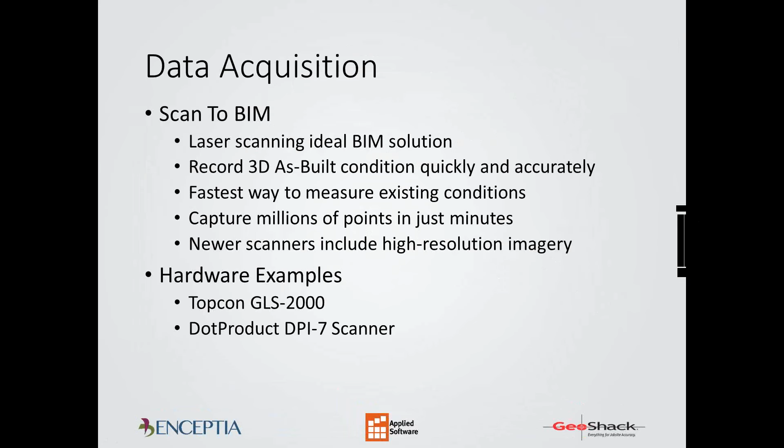I'm going to quickly show you two scanners, the Topcon GLS 2000 and the DotProduct DPI-7 scanner, and give you a little example of how they're on two different ends of the spectrum, but can both be used and be very powerful as far as collecting data.

The Topcon unit you see here will shoot point cloud or measure out to over 1,100 feet, and it will easily collect points in full dome in about 3 minutes with images. There are 2 cameras on this unit, a telephoto lens and a wide-angle lens, so we can capture very high-resolution images if need be. But what's really different about this unit compared to some of the other units out there is that it will register scans automatically.

Now what that means is many times we have to take this scanner, set it up on a tripod, and move it to different locations in a particular area, and then afterward we tie those different scans together, or register them together. This unit will recognize it during the scanning process and register automatically for us.

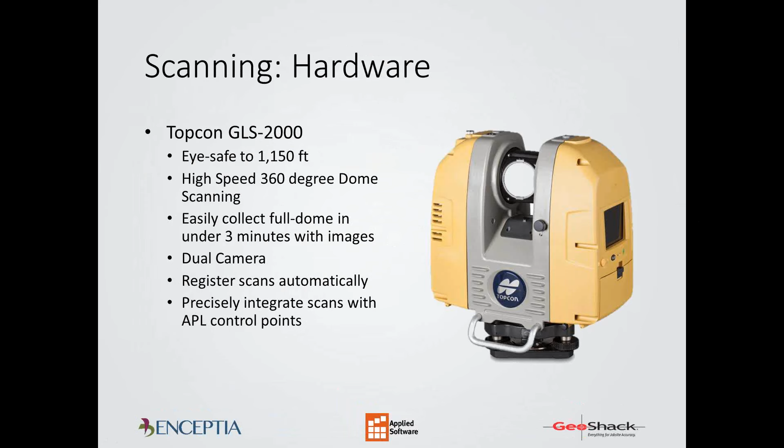Another important feature of this is that it integrates with APL control points. I'll show you Autodesk Point Layout a little bit later, but as long as we have control points at the job site in our model, we can take this point cloud and bring it into our model quickly and compare it to our design model.

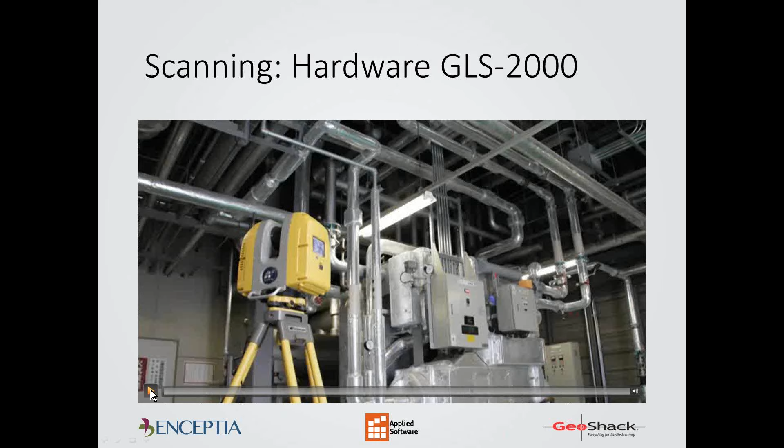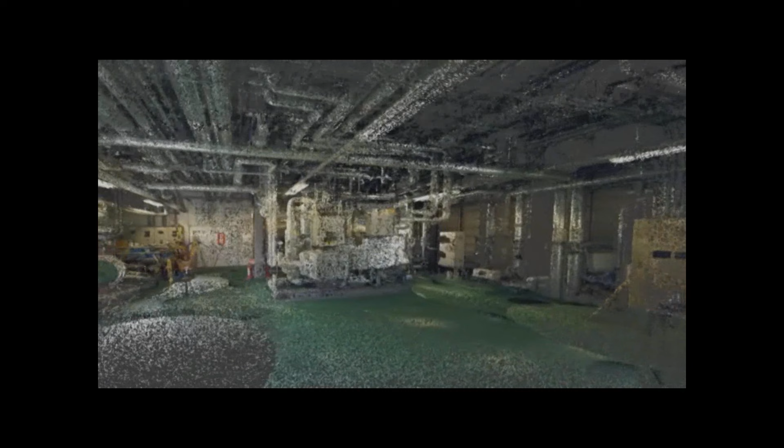Now what I wanted to show you here is just a quick little video. I'm going to turn off the volume here, it's a very short video. This is a picture of the room, there's the scanner. For those of you who haven't seen point clouds, you are looking at a point cloud. Notice that as we move around, the imagery kind of fades a little bit and we're looking at the points, but as we stop, all those images that have been recorded are now visible. So it looks like we're in a true 3-dimensional model when really we're just floating around in our point cloud.

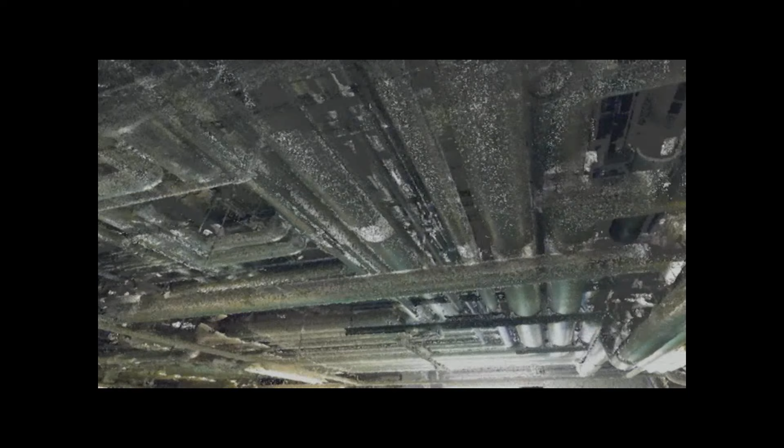We do work with other partners that will recognize these points that represent a pipe and replace those points with an actual pipe. So there are ways to convert this point cloud into a BIM file to use back at the office. On the opposite end of the spectrum is this DotProduct DPI-7 scanner.

It's a small handheld unit, and what's great about this unit is it's great in tight spaces. One of the things with the larger scanners is that you have to move them constantly. They set up in one location, but they may not see the entire room because objects may be in the way. Well, with this unit, you are literally walking around the space, and you can walk around objects that are hiding specific locations in the room.

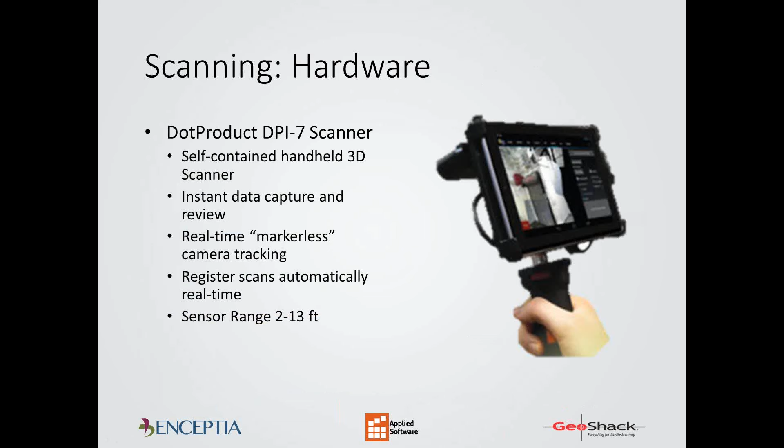It also has real-time markerless camera tracking. You may have seen scanners on job sites where they place markers up on walls or columns, used on purpose to tie those scans together or register them later on. With this unit, it'll register the scans automatically. And the range on this unit is anywhere from 2 feet to about 13 feet. That may not sound far, but for what this is designed for, it's the perfect solution.

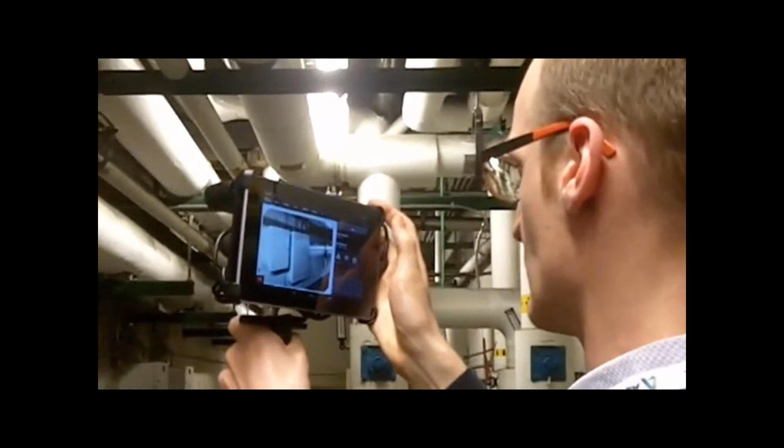I'll just show you a quick video of what it looks like running this scanner. Here we're holding the scanner. You got a nice big screen. You can see it, it looks like you're shooting video.

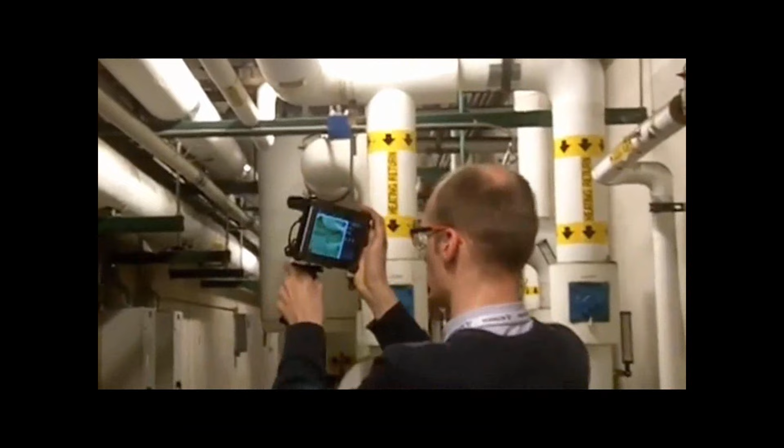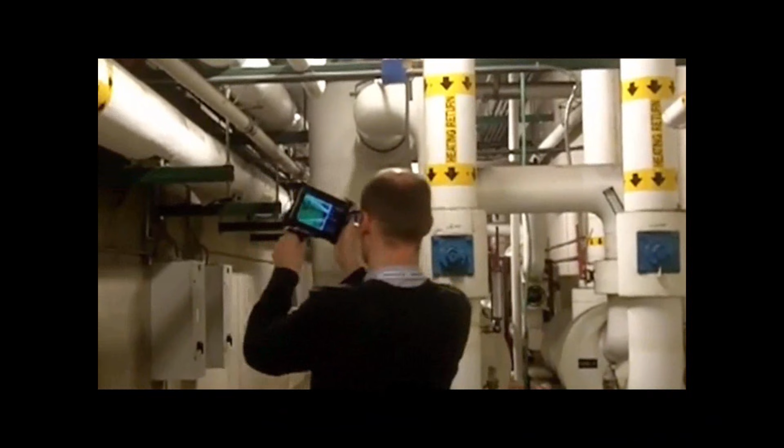What we're going to do is get this set, then hit the record button. The screen turns green, and now literally you're just walking along, scanning everything that you see on the screen. You just move this up and down and around until you grab all your points. If you later find out you missed a spot as you're reviewing it, you can go right back to it and it'll register the scan where you left off.

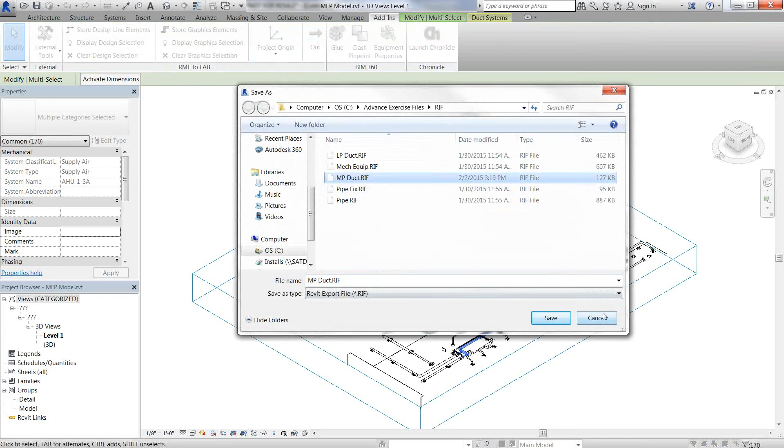So I'm going to select store design line elements and save this out as my RIF file. Once I have that done, I'll go ahead and bring that directly into ESTmep. One thing I'll note here with fabrication products having a unified database, I can bring this directly into ESTmep, and that will allow me to send it straight to CAD MEP to finish out the detailing and CAMduct. So it's really what I want to show in this process. Go ahead and import that RIF file.

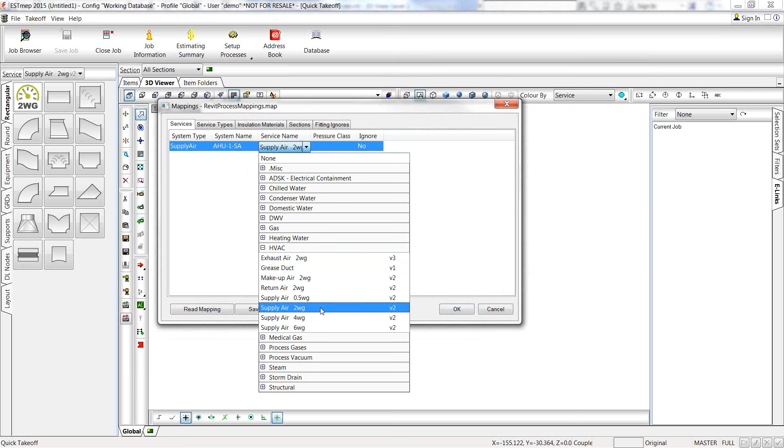You'll see here, I've already gone ahead, and it remembers, since I've done this already, I have my system type and my system name. Here's the information brought over from Revit. I'll simply select the service that I already have defined in CAD MEP in my database. The service has my pressure class assigned to it, so when I convert this over, it will give me my standard straights and fittings based off of my shop standards. So I'll go ahead and select OK.

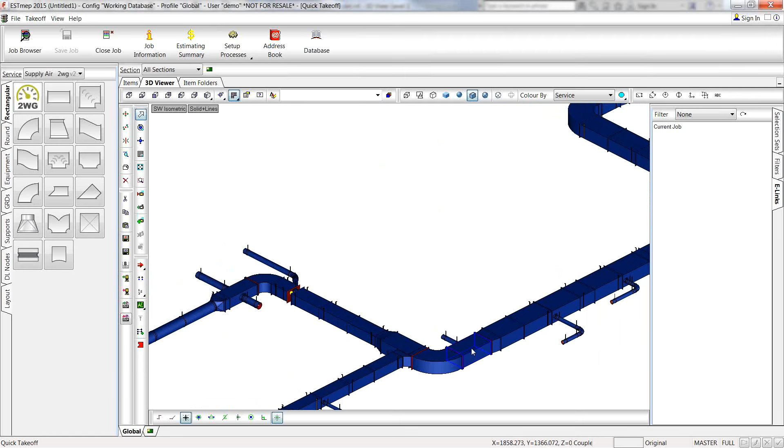And there you go, that was that quick, converting the Revit model. If I zoom in here and look, you'll see my straights are based off my pressure class. You also notice that there's some missing gaps. So while this is a good conversion, there's still going to be some things that need to be fixed. Like I said, here's my standard straight, following my pressure class, giving me the correct connectors and seams. We'll worry about fixing this stuff once I bring it into CAD MEP.

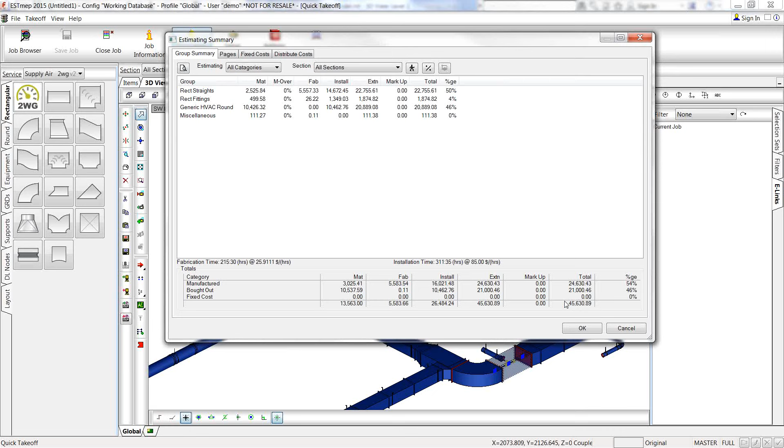Run my estimating summary, and here it will give me a material cost, fabrication cost, and install cost, all set up based off of your shop standards, and give me a total. If you're using plumbing or pipe, you can also use Harrison or a similar supplier to bring in your pricing. You can also run reports, so here's an ancillary list, as well as export this data out to Excel.

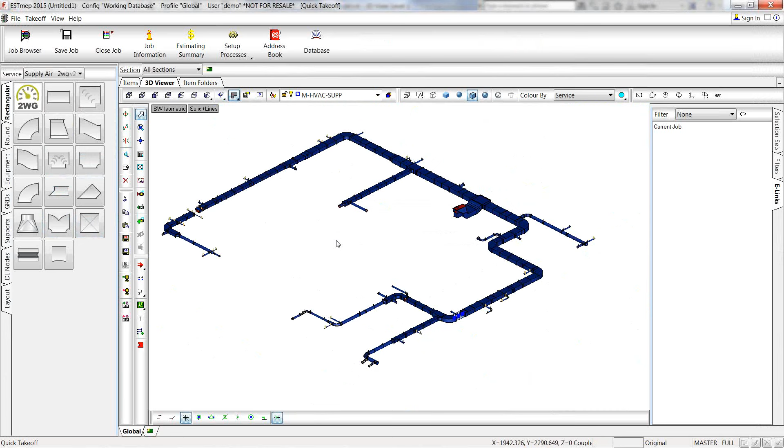So once I've won the bid, I'm ready to send this over to CAD MEP and let my detailers finish out and fix some of the things. So I'm going to go ahead and save this.

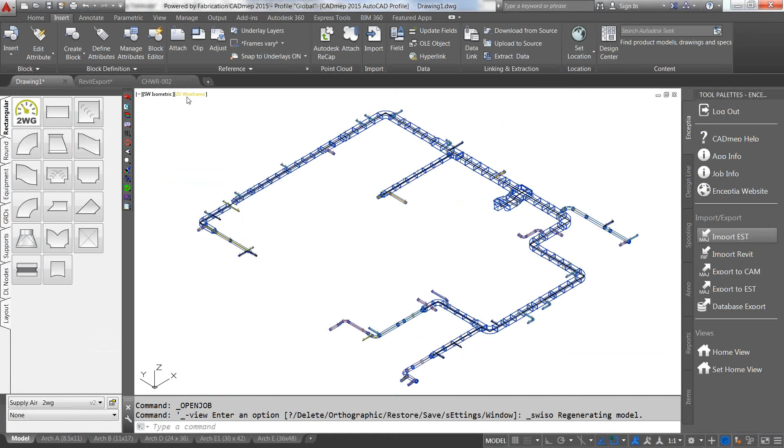And open up CAD. I'm going to open up that same exact design in EST. And there you go. So now that I have it into CAD MEP, I'll go ahead and make the changes that I need to, so that I can get it ready for coordination.

So I'll take a look here. I've gone ahead and made some of the changes that I need to and fixed some of the changes as well. I wanted to note when I bring it over into fabrication, with design line, it will fill in my hangers automatically. So that's one thing that was added from the Revit file to CADmep and ESTmep, are my hangers.

So now that this is ready to go to Navisworks, I'll send it over to Mark.

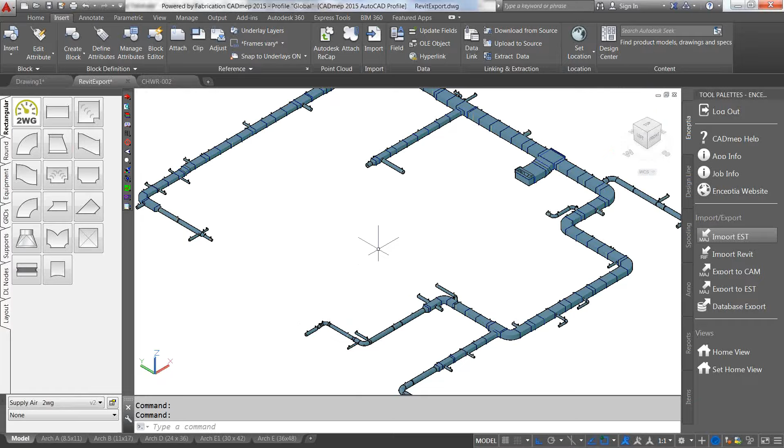All right, thanks, Lyle. So now I'm going to talk about coordination because we have that design file now that Lyle has done. We want to make sure that it's coordinated with the rest of our project. So we have a couple different ways of doing this.

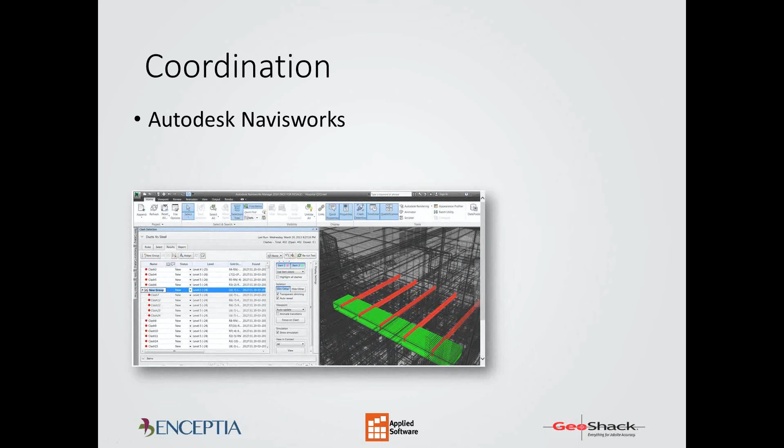Autodesk Navisworks has been around for years, and traditionally we've used this primarily for clash detection. Navisworks does a whole lot more than clash detection, but this is just about what everybody uses Navisworks for. Recently, Autodesk BIM 360 Glue, another product by Autodesk, it's a cloud service that we can do clash detection in the cloud. So both units allow us to do clash detection.

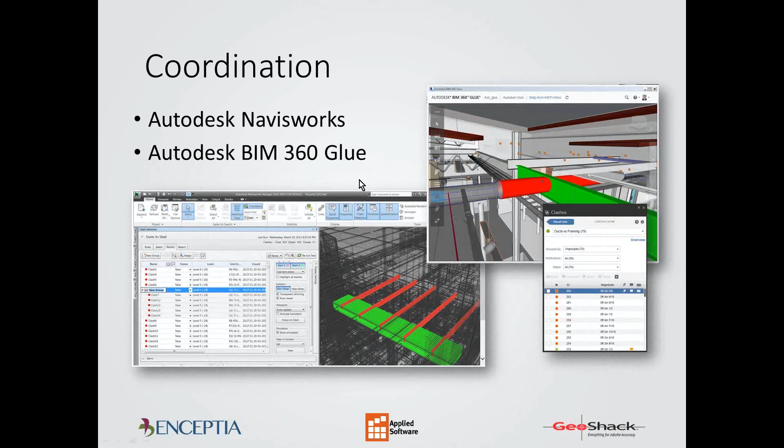We get reports and we can find out where the clashes are. But there are some advantages that Glue has that Navisworks does not have, and there's also some advantages with Navis. Let's just look at the workflow when we use Navis and then the workflow when we use BIM 360 Glue for coordination. So Navisworks Manage.

Typical workflow. Typically you have your architect, your structural engineer, MEP engineer. They're all working in their own little silo, creating their models, and then they will send it to a BIM engineer, typically the BIM manager. The BIM manager will collect the files. Now the way the files are sent traditionally has been like FTP, and that could take many hours. Then the BIM manager has to download those files, has to put them all together, bring them inside of Navisworks, and then start generating clashes.

When clashes are complete, then clash reports are sent to the architect, another set of clash reports are sent to the MEP engineer, and each discipline is working independently trying to resolve their clashes. Once they resolve their own clashes, the architect will get the files back to the BIM manager, maybe in a couple days. The MEP engineers, they're a little bit better at this, and they'll get their files back to the BIM manager maybe on Wednesday.

On Thursday, the BIM manager then collects all the files and starts doing clashing again. By Friday they may have resolved 50 clashes, but because the architects and engineers have been working in their own files, there may be 40 new clashes that have been created because they didn't know the changes that were taking place with the other disciplines.

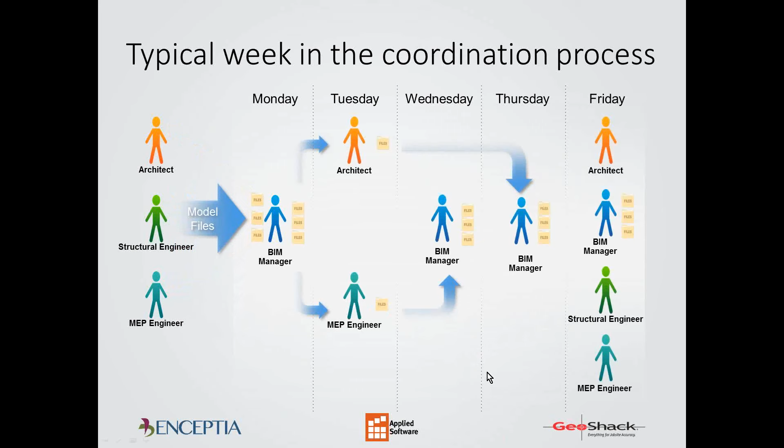Now this has been the traditional workflow with Navisworks Manage. It can always be improved. It's still a very good workflow, but let's talk about how BIM 360 Glue will be able to do that. And actually I have a video very quickly which I forgot about. This is going to show Navisworks and how quickly we can do a clash. In this particular file I have structural, MEP, and I have an architectural model that I'll bring in.

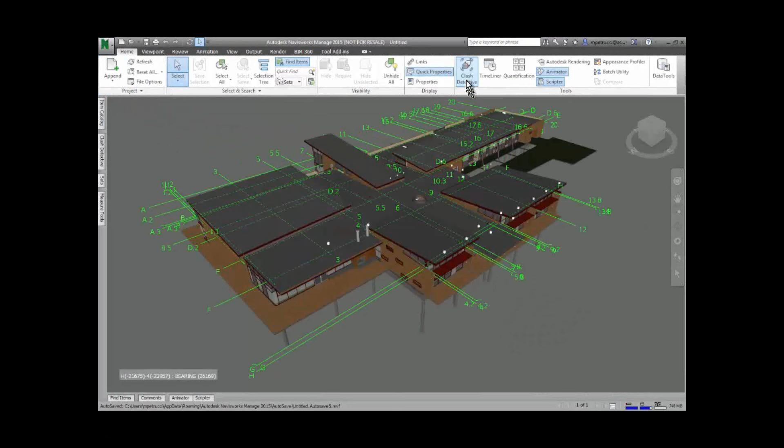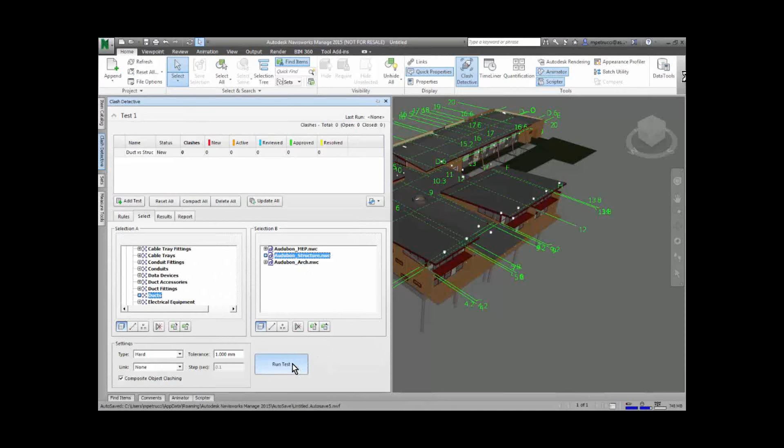I receive these files from the architect using AutoCAD or Revit, and I'll just quickly generate a clash report. So I want to clash and see if I have any ducts that are interfering with any of my structure. So I'll go ahead and select from my MEP model, I'll go ahead and select just my ducts. Now this is the BIM manager doing this, and quickly, instantly, we get a report. And so here's clash number 2, and when I select it, it takes me right to where the clash is. And if I keep clicking on a different one, it takes me to a different clash. The rest of the model is grayed out, so it's very easy to identify.

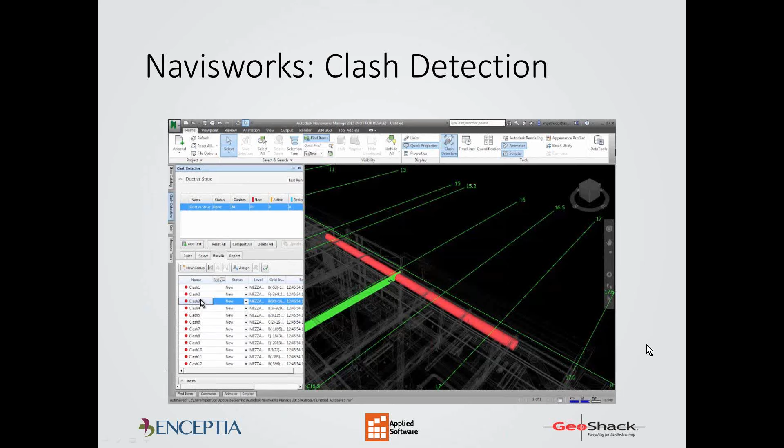What we typically do is generate a report, a paper report or an electronic report that gets sent off to the architect and engineer. But that paper report is obsolete. As soon as one person makes a change, it's obsolete. So with BIM 360 Glue, what we do is on Monday, the architect, the BIM manager, the structural engineer, MEP engineer, instead of sending their files to the BIM manager, they send it directly up to the cloud, to the BIM 360 cloud. And so now at any time during the week, the structural engineer, the MEP engineer, they can compare their models. The MEP can quickly do a clash detection anytime, and they don't have to wait for the BIM manager to do it.

They don't have to wait for him to collect the files and then send the reports out. It's advised that as you're working on a project, you update the model in the cloud at least once a day, if not 2 or 3 times a day. It's very easy to do with just one click of the mouse.

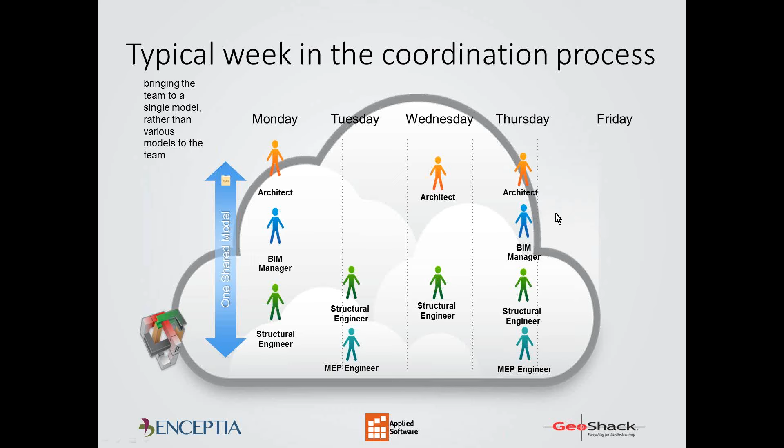So really, we can get a coordinated model by Thursday instead of Friday. We finish a little sooner, and we'll have fewer clashes because we're always comparing our updated model with whatever's in the cloud, and as long as everybody's updating regularly, we'll be able to resolve clashes much quicker.

Some key advantages of BIM 360 Glue coordination over Navisworks: first of all, the model is up in the cloud, so there's always the latest version up there. But a nice key feature is that we can run BIM 360 Glue on the iPad, so I can review the model on the iPad as well as in the office.

At the same time, I can do markups in both locations. What's beautiful about doing markups using BIM 360 Glue is that a view gets saved wherever the markup is, and you send that off to the person who needs to resolve that particular issue. As they resolve it, they'll get a link, they'll see it, they know what corrections they need to make, they can quickly update their model and then repost a new model up to the cloud, or glue a new model up to the cloud.

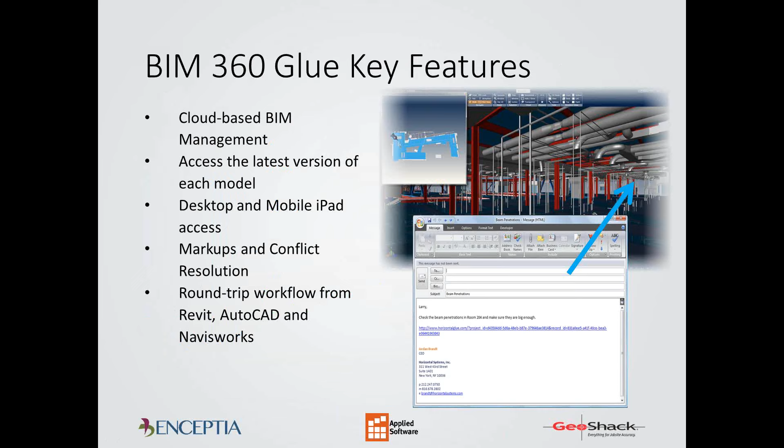The round-trip workflow—there's a feature inside of AutoCAD, Revit, and Navisworks called Pinpoint. When there's a clash up in the cloud, I can pull that down into my model and pinpoint where it is, so it'll highlight the specific object that's clashing. I don't have to go searching for it. Pinpoint will take me directly to where that clash is, or the object that is clashing.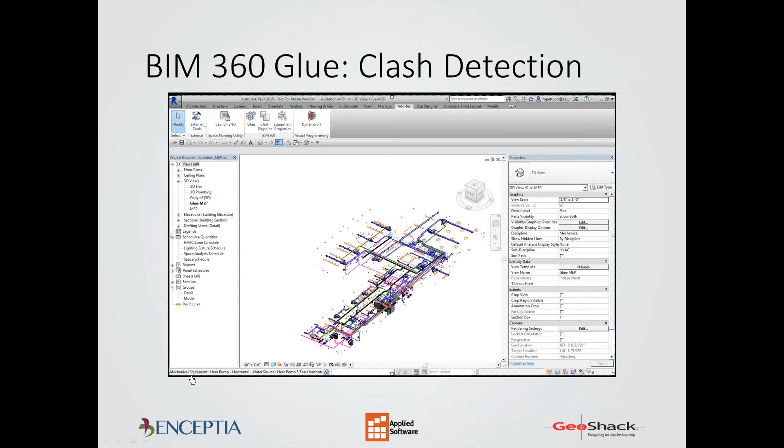I'm going to go ahead and just show you a quick video. So one click, I click Glue. The first time it's going to ask me where to post it. I'm going to pause this right now, and I'm going to post it to a specific project that the BIM manager has set up. Once it's been set up, anybody who's been invited to this project can glue their model.

I could also review markups, clashes, any new views that have been created. I could review this list of files that have been recently modified. As I access this project, I can see all the activity that's happened with my model.

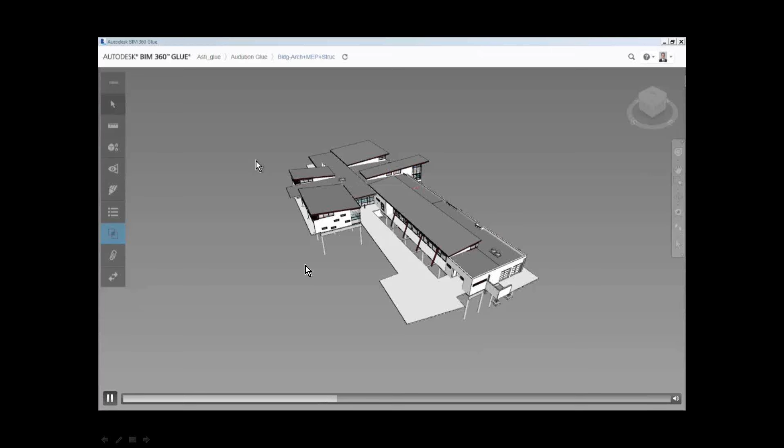I am now opening up the Glue model from my desk, but it's the same workflow as from the iPad. On the desktop, I already have a clash report created, so I'm going to rerun it. As I run this, I'll notice that I have a list of clashes.

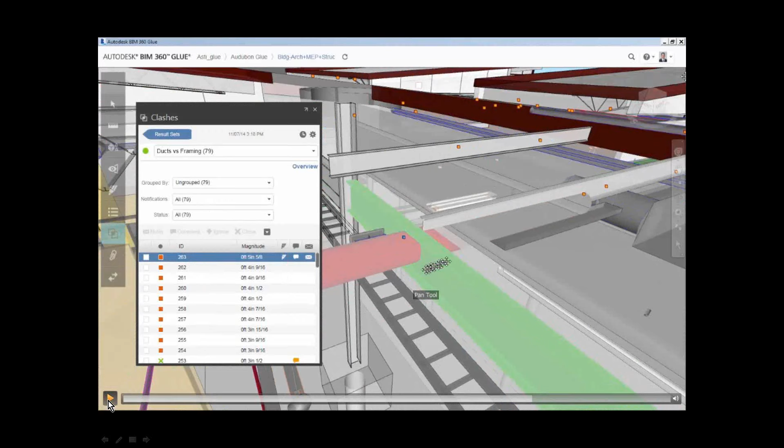I have 79 clashes. Just like in Navisworks, if I select the clash, it takes me directly to it. It highlights the two objects. There's actually another screen I could turn on that gives me more information about each of these objects, but I can see visually where they are clashing. From here, I could email that clash to the necessary people to get it resolved.

So now the purpose here is to make sure that we have a coordinated model. By taking all the reports, the clashes that we have found, and then resolving those clashes and updating our model to resolve those clashes, now we're ready for fabrication.

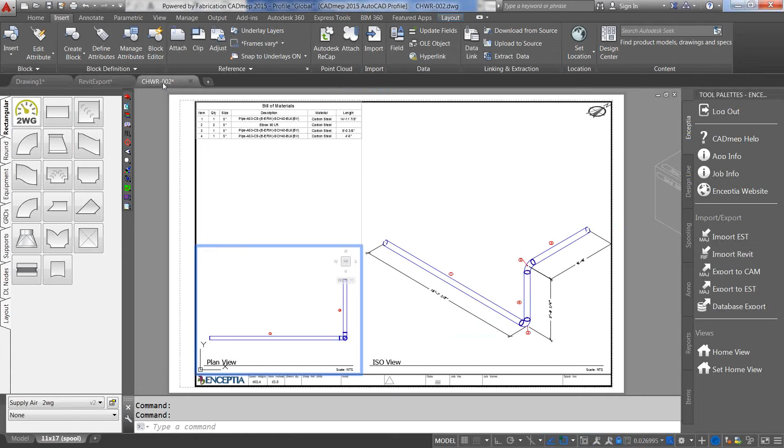Okay, now that this model is ready to be fabricated, for this exercise, I'll send this to CAMduct since I've got sheet metal items in here, as well as if it was pipe or plumbing, I can go ahead and create my spool sheets in here, or create my linear nest sheets for my pipe cut list.

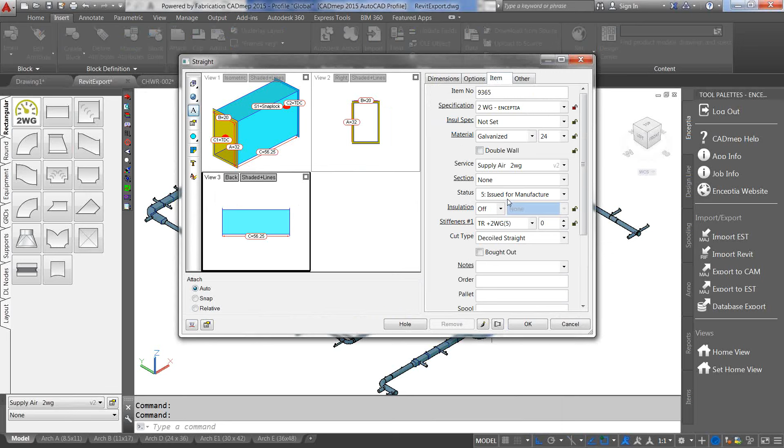So to export this out, I'll just cam it out. I've already done this to save some time, but what I want to make note of here is after I've cammed it out, if I take a look at the status on my items, it's issued for manufacture. We'll take a look at this in CAMduct after I nest it and create the NC file.

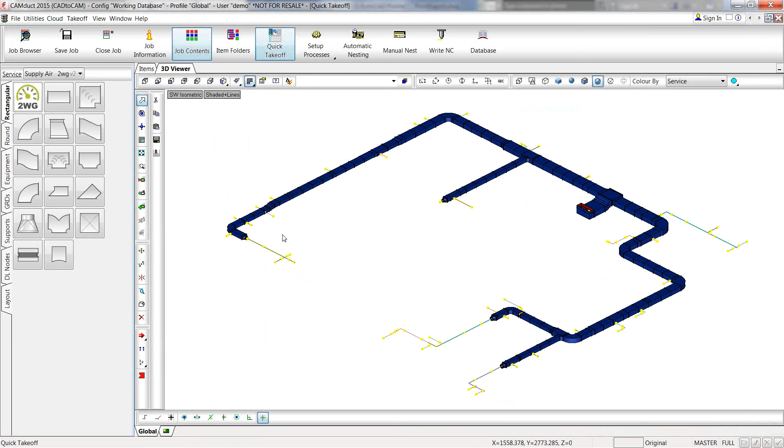So once I've exported it out, I can open up CAMduct, open my job, and take a look. Here are just those items that I exported out, just my rectangular pieces.

So once I have it in CAMduct, and CAMduct's been set up for your specific equipment out at the shop, I can set up a process to easily create my NC files. With this process, I can also have it automatically print reports and labels.

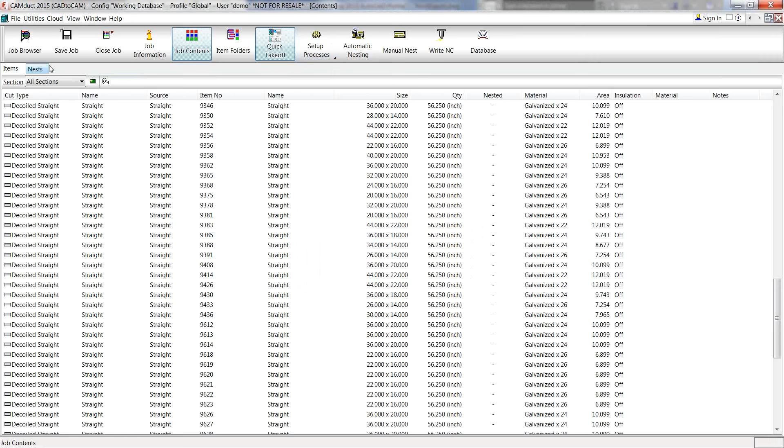So let's go ahead and select my process. And what you're seeing here, it went ahead and created the NC files that I need for the table. It was that quick. If I go out to the shop, I can punch in this NC file.

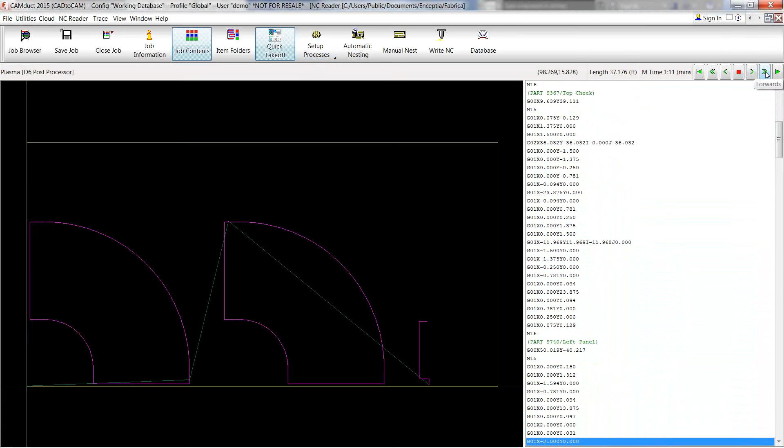I can also preview it in CAMduct to make sure that it's going to do what I want it to do at the table before I burn this. It's just kind of a checkpoint to make sure that it looks correct before I burn this. Just kind of speed that up.

As well as, like I was saying, some of my labels and reports. I'll take a look here, going back to that status, I can print out my item labels and put a QR code or barcode, so that way I can use Tracker to scan each item, and it will change my status depending on wherever this is at in the workflow.

So I've gone from EST to CAD, from CAD to CAM, out to the shop, onto the truck, installed, and so forth. So I can track that whole process by using Tracker.

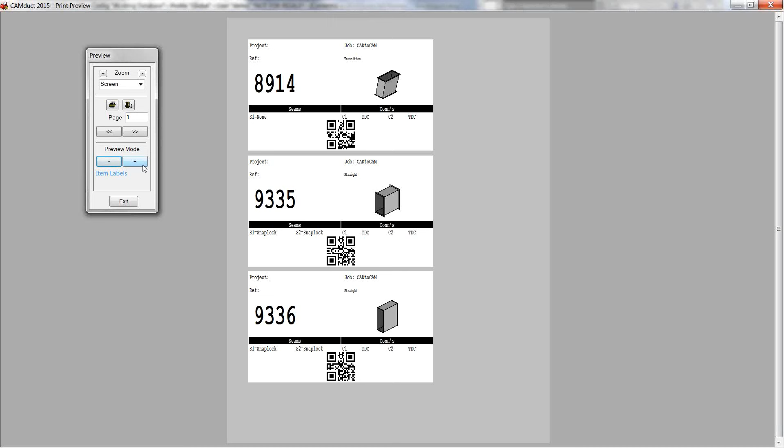So here's my item labels. Here's a weight summary sheet giving me a total of metal used and my ancillary list.

So we'll go ahead, once that's done, then I'll send this back over to Mark and we can take this model out into the field.

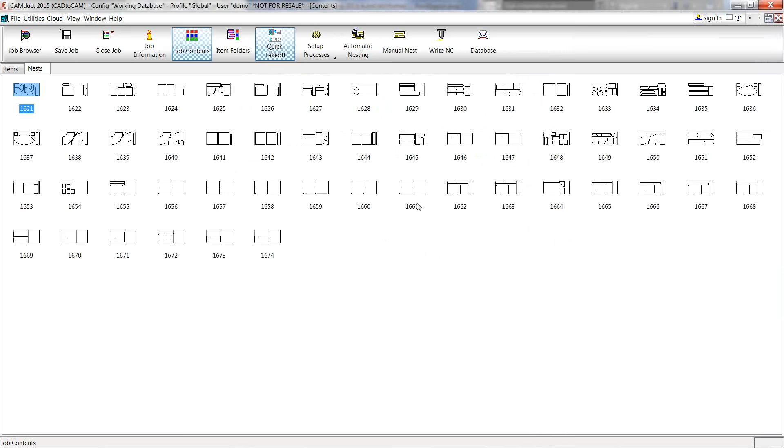All right, great. So now we've got our product. We want to go install that in the field. So we need a quick and accurate way to locate in the field. So this is where Autodesk Point Layout and Robotic Total Stations come in.

So how do we do this? It's really very simple to get our MEP CAD BIM data to the field. And I put here it's as easy as 1, 2, 3, 4. First we need some equipment, Robotic Total Stations. Next we need Autodesk Point Layout. It runs inside of Revit, AutoCAD, Navisworks.

We identify the key users, typically our BIM team and our field team. It's important that we get them both working together so that in step number 4, in 3 to 4 days of training, you can be fully integrated and working together to get the CAD data, the BIM data, out to the field accurately. So how have we always done it in the past?

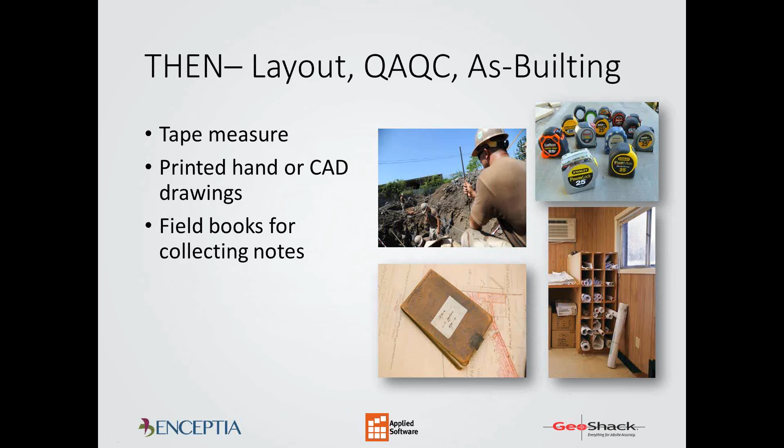Traditionally, we've always done it with a tape measure, printed hand or CAD drawings, field notebooks. You know, who knows if we have the latest drawings? And our tape measure, field notebooks, mistakes happen. We don't mean for that to happen, but sometimes we'll take a measurement that should be 16 feet 9 inches, and we measure 19 feet 6, and we write it down incorrectly.

Well, we need a way to reduce those mistakes, and so that's where the Robotic Total Station comes in. This particular total station is the Topcon LN100. It's completely robotic, and when I say robotic, that means one person can operate this. In the early days when I was working in the field, there was always 2 or 3 of us.

I was the rod guy standing there with one guy looking and telling me which way to go. Well, with the Robotic Total Station, I set this up. I have a handheld tablet PC, and I look on the PC and it tells me where to go to locate my hangers, for example.

What's really nice about this unit, it is easy to set up. It's self-leveling. So basically, I press this green button. I just wait about 45 seconds. It'll spin around, make sure it's level, and I'm good to go.

It'll shoot up to 330 feet, so about 600 feet total diameter, and I'm accurate to within 1/8 of an inch. I shoot to a prism to measure. There are some units out there that will shoot prismless, but depending on the angle in which they hit, it's not as accurate as shooting with a prism.

So here's an example. These are the basic components that you need. The Robotic Total Station can be mounted on a column. On the MEP side, if you get into a project with metal deck, get a column clamp to a column, and then you can locate where to place your hangers on the metal deck.

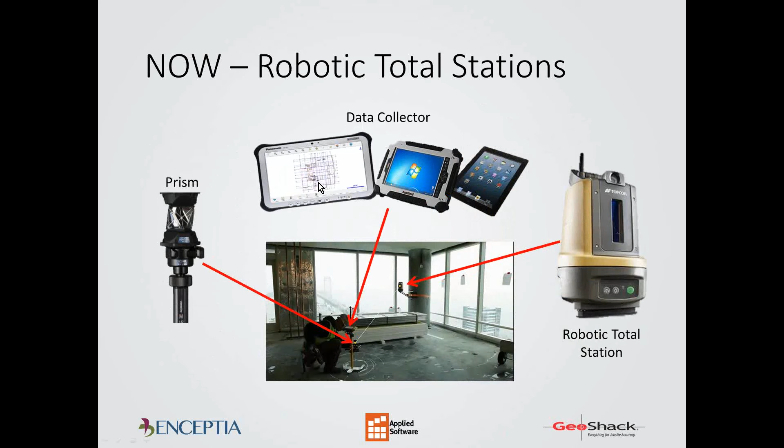So there's the equipment. Well, to use the equipment, I need to get some points. So what are points? Here's some examples of what points may look like. On one side I have Revit, on another side I have AutoCAD. I have some hangers, and at the top of the hangers gets placed an object. That object will have an X and a Y coordinate, as well as an elevation coordinate if needed. It's not always required, but it's always there.

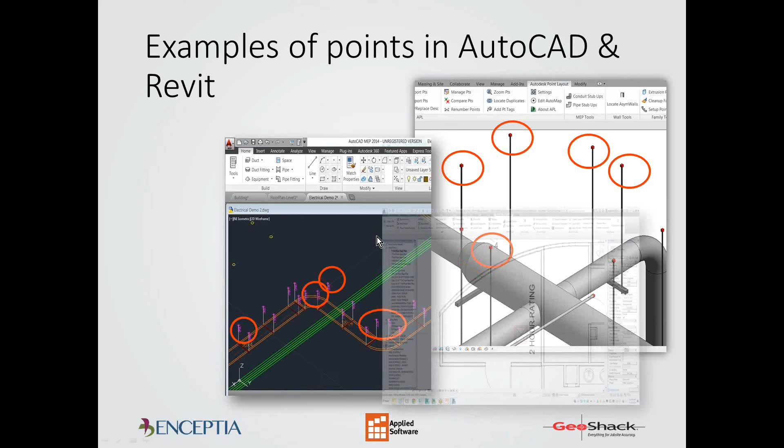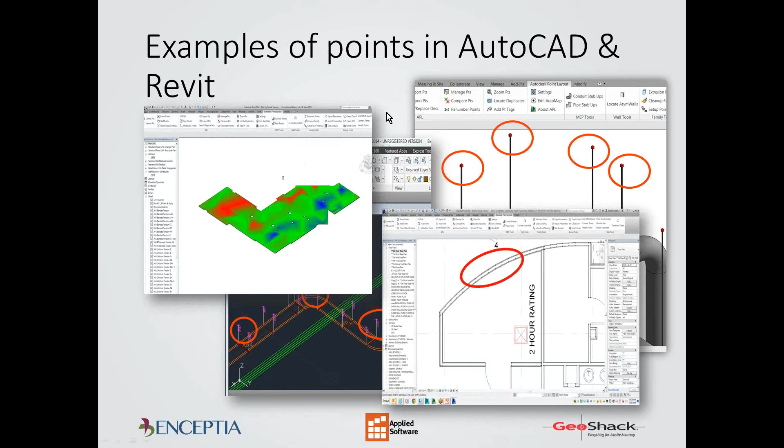Those points then I could use with my total station. Other features I can do is locate walls, or with Autodesk Point Layout, I could do a slab analysis to see how flat a floor is. So there's a lot that we can do with APL than just locating our hangers, but it is very important that we use that to do it accurately.

The 3 major workflows for APL: one is layout. That's where we put the points in our project and then we transfer them to the field, and we can locate those points accurately, efficiently, and we reduce errors. If I measure with a tape wrong, I don't know that till later on in the project. If I use a robotic total station to locate my points, if I'm not in the right spot, it tells me. If I'm off by a certain tolerance, it will tell me.

So there's no reason for me to make a mistake out in the field with a robotic total station and APL. Two is QA/QC. When those points are located in the field, I can collect those points and then compare them to my design model. And I could say, show me all the points that are off by 1 inch or 1/4 of an inch, whatever I want to set. So I can do quality control just to make sure that what is being laid out in the field is matching my design model.

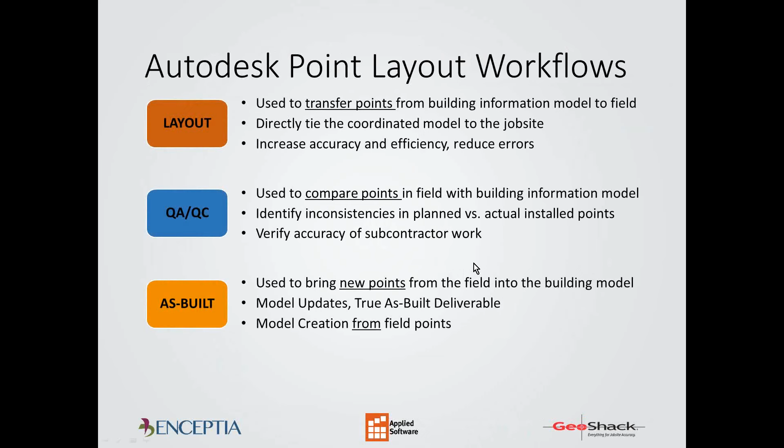Now, for some reason, points were moved on purpose in the field. I'll see that too, and then I can update my model to match what's in the field, which leads us over to as-built. There may be objects that are not in my model, but I want to record them. So I can record points that are out in the field, such as maybe an existing pipe that's not in my model. I could shoot those points, and when I bring them back into my BIM program, I could say connect those points with duct or pipe or a wall or whatever other object I want to put on those points.

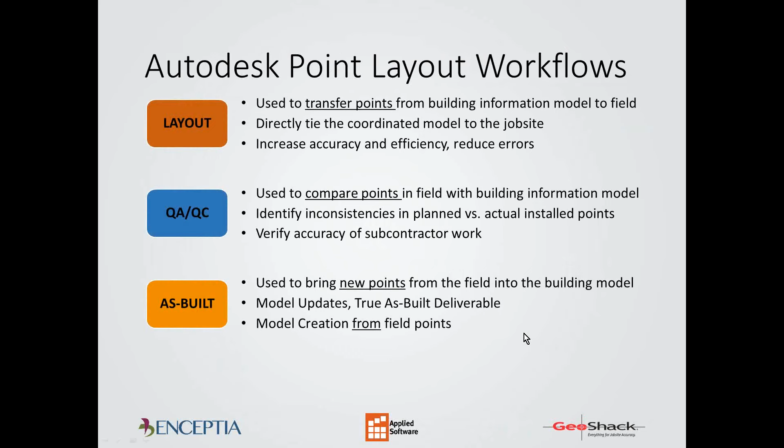This is a video, but what I'm going to do is actually go ahead and show this to you live. So here's an example of a Revit model. I have some hangers in here, and I have some pipe. Just to show you how quickly we can put points in here, I'll use Autodesk Point Layout.

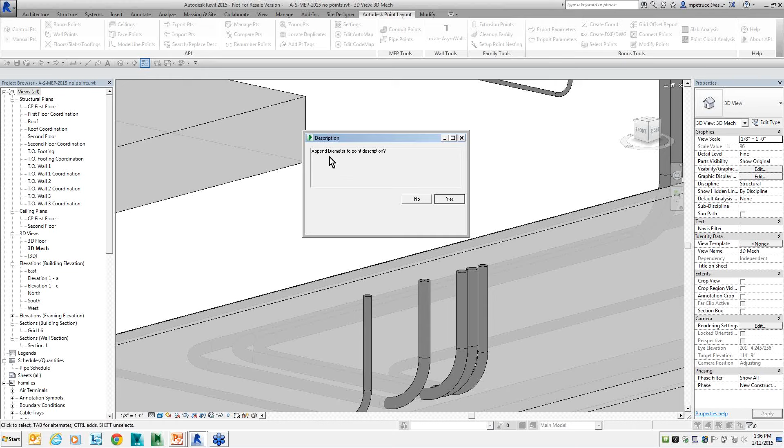There's a pipe point routine, and I'm going to go ahead and just do all the points in my project. I'll do all the vertical, and I'll do both the top and bottom. And I can give this a description. I can use a standard description, or maybe a custom one, I'll just put in here 'pipe point.' Then it's going to ask me if I want to include the diameter, and I'll go ahead and click yes. All of a sudden I see these little points that appear.

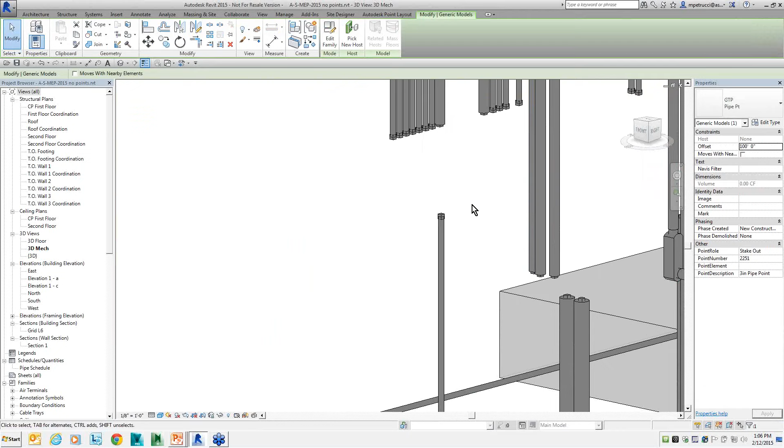When I touch on this point and take a look over here, this tells me it's point number 2249. It's a 2-inch pipe point. If I click on the next one, it recognizes it's a 3-inch pipe point. All my pipes, all my vertical pipes, and conduit, if I want to do conduit as well, I can place points on them that quick.

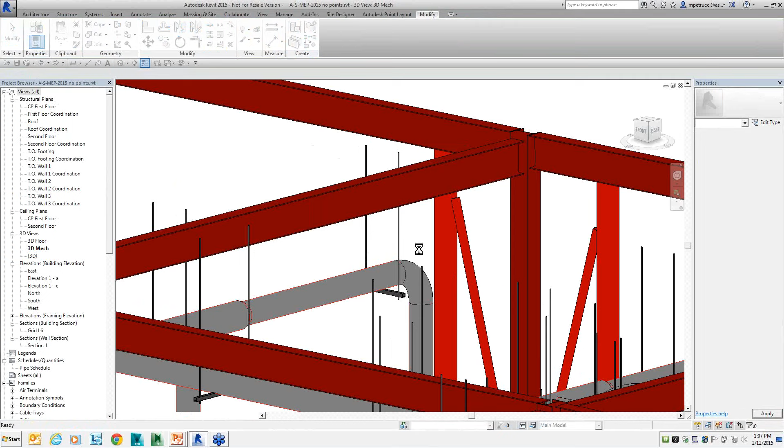As far as my hangers, I can select the hanger and quickly modify it. I just put 2 points on the top of my hanger. I'll push that back into my project, and I'm going to overwrite these, and immediately you'll see little points show up here. Those points now have a coordinate associated with them, and they're associated with the project.

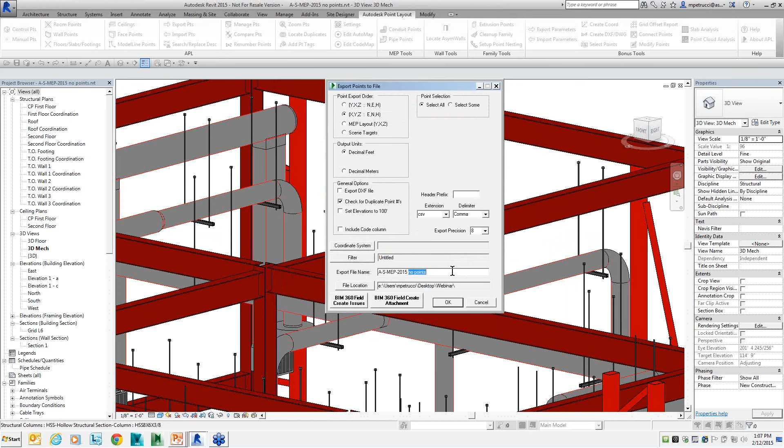So I can quickly and accurately locate those points. With Autodesk Point Layout, once I locate these points in my project, I want to give them to my field team, so I'll go ahead and export the points. If I go to Filter, I can select all my duct points, or maybe my pipe points - but I'm going to select duct points. I'll click OK, then export these out to a file. Maybe I'll call it points to layout, and save that to my computer.

What I'm going to do is switch to a project where I already have some points in there - looks very similar. But now let's say my guys have gone out to the field and located those points. At the end of the day, they're going to give me that point file back. I want to see how accurate they were at laying out points.

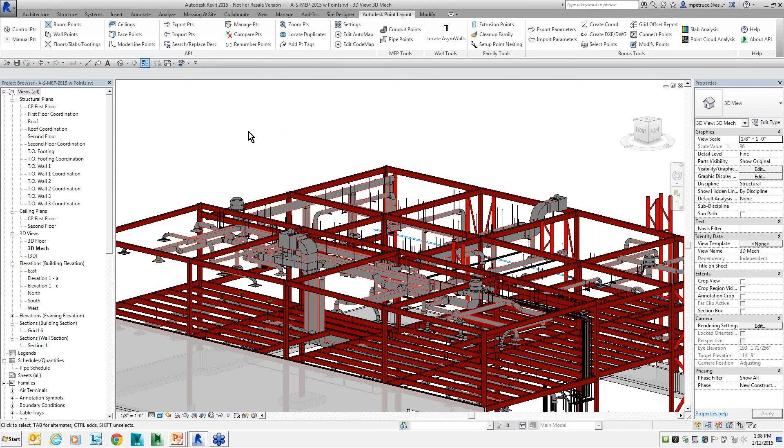So I can do, with APL, compare points. I would go ahead and select the file that they staked out. This is what they started with in the morning, and this is what they came back with at the end of the day, staked in the field. I'll open that up, and immediately I can see that there's a delta.

I've got some points that are off by 0.01 feet, and maybe I want to filter this and just look for points that are off by more than half a foot. And I got some points that are off by more than a foot. So I may raise the question back to my team and say, hey, why did these points move? But I'd like to see how these points look inside my model.

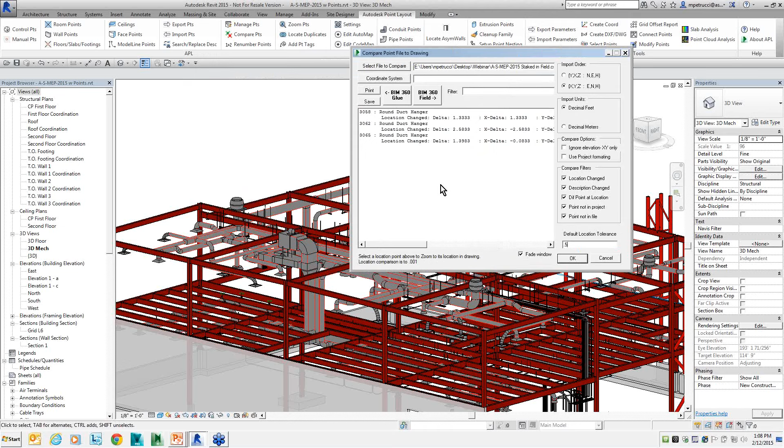If I click on 3058, it takes me right to that point, and I could zoom out and see this hanger is that point. Now I put a little circle here to note those particular points, and I purposely moved them. I can quickly see this hanger is interfering with the structural steel - maybe the structural model wasn't up to date when I was placing that hanger.

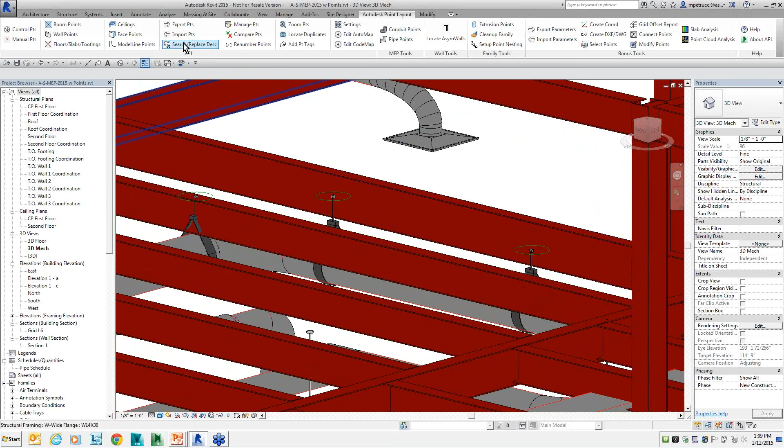So because they moved those points and had to move, I can say, let's go ahead and import your points to update my model to make it a true as-built now. So I'm going to select that same file, and I'm going to go ahead and just simply click OK, and it's coming back telling me that I've got some points that have to move.

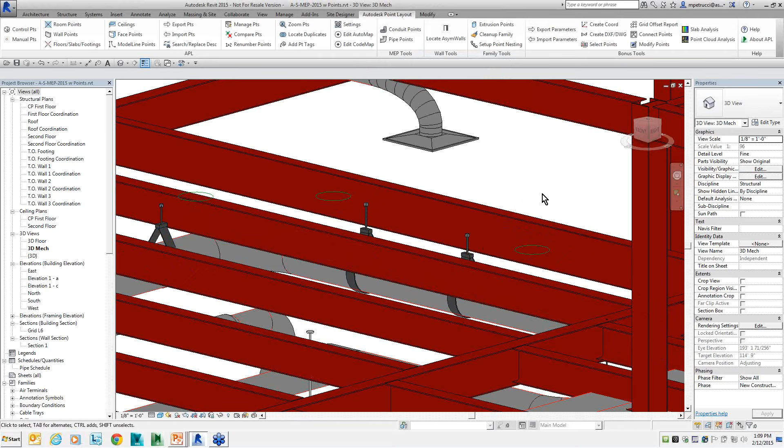So I'm going to go ahead and hit move, and keep an eye on these three hangers right here - you see where the circle is. So this hanger was moved in the field, and that's where it should be. These two hangers were moved as well along the ductwork, but you can see where they used to be. So that's how quickly I can use the information from the field to update my model.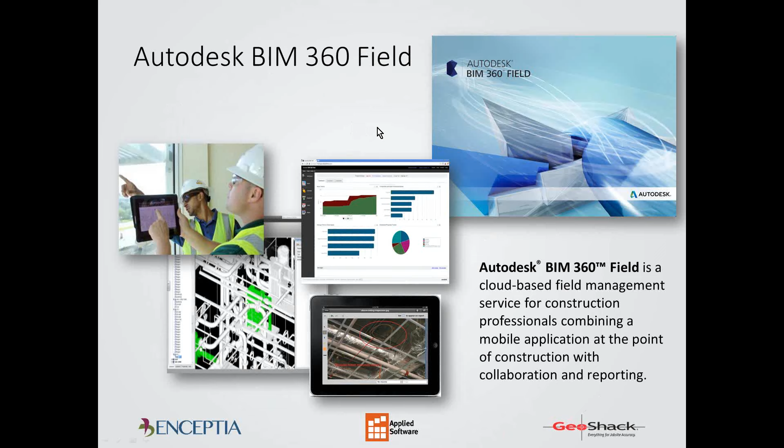Next, we're going to talk about BIM 360 Field. BIM 360 Field runs in the cloud, runs on the iPad, and it's a great way to manage your project. It's designed for the construction professional to use. With BIM 360 Field, we have all the information we need related to the project, and we can generate issues, tasks, and checklists to help our team in the field. So it runs on the iPad.

I'll go ahead and just click on a link to show this, and I'm going to talk about these different options or modules inside BIM 360 Field. The most important one is issues, followed by checklists, equipment, tasks. Tasks may not be used as much, but you can choose what to use and what not to use. So let's take a look at each of these different modules.

First thing is the library. The library is where we can store all of our CAD data, PDFs, Excel files, Word documents - any sort of electronic file we want to put in our library, and we can access it. It's a nice interface - you'll see a list here, a folder, and then a little preview of the different PDF files that might be available.

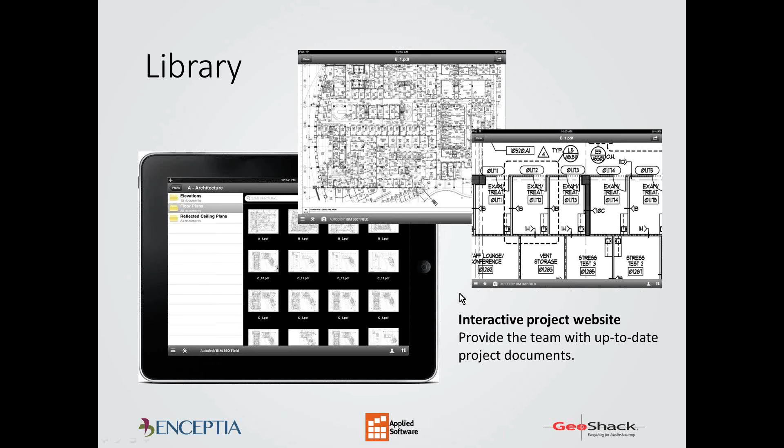Related to those PDF files, I'll use that when I want to create some issues later. But first, let me talk about photos.

Pictures are worth 1,000 words. I'm at the job site, I notice a problem, I can immediately take a photo with BIM 360 Field. I can mark it up, and then from there I can email or create an issue with this photo.

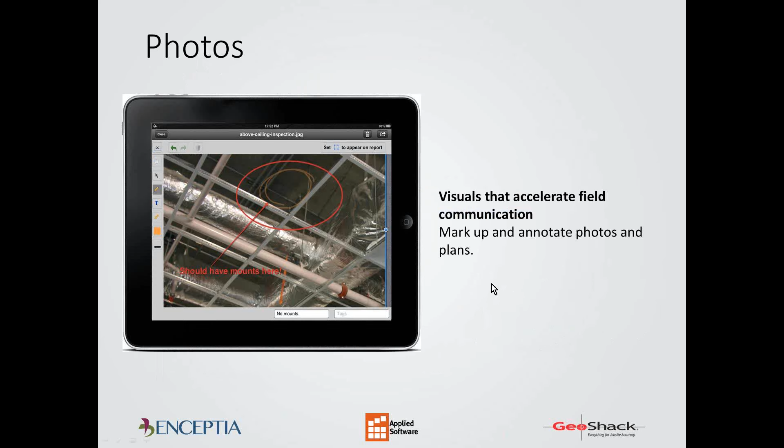So issues. This is the biggie right here. I can log, assign, and track items to completion. When you're walking around the project and you notice an issue, a problem, you can immediately address it, and BIM 360 Field will ask you to fill in some information, for example, what's the location and what is the issue.

If it's something having to do with MEP, it will automatically assign that issue to the MEP engineer. If it's dealing with structure, dealing with walls, it will automatically assign it to the structural engineer or to the wall subcontractor. It does that automatically for you.

So you only have to fill in a few key pieces of information and a description of the issue, and from there the issue becomes open, and it needs to get tracked and resolved by the person it was assigned to. Once they resolve it, it goes back to the person who originally generated the issue, and then they can inspect it, and if it looks like it's been completed properly, they can close the issue. Otherwise, they can send it back with any sort of notes to resolve the issue.

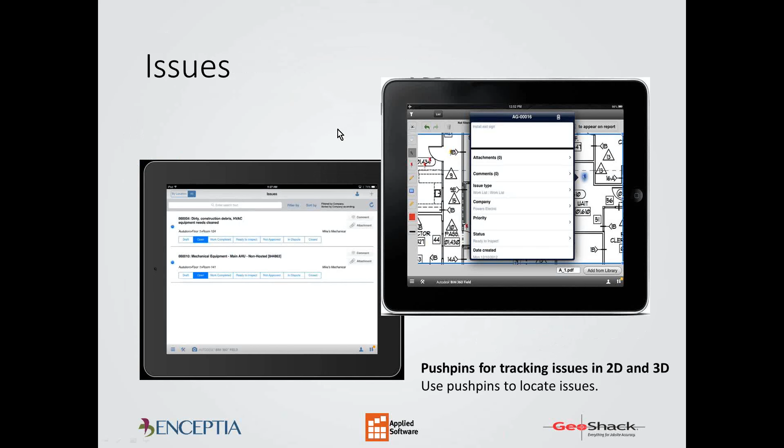Checklist. There are many predefined checklists, and we can also help you create additional checklists. Basically, with our checklist, we can adjust the responses, yes or no.

All the yes responses, great. If there's a no response, that means an issue is created automatically, and immediately you have to fill in information. So now you have the checklist to help you generate issues.

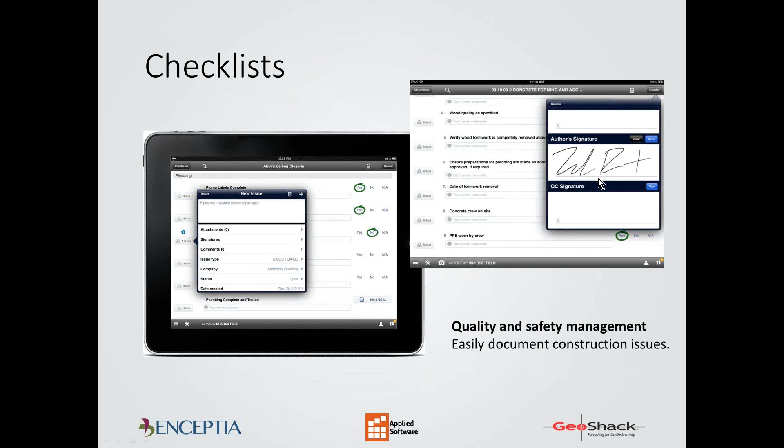Great for people that are new to the field, to review the checklist and to help them create issues when something doesn't match the checklist. And with the checklist process, there's a signature so people can sign off on it, and also the person inspecting it can sign off as well.

Another key feature, equipment. Building components can be tracked from design to handover. There can be barcoding involved with some of the equipment that's delivered. With BIM 360 Field, I can scan the barcode, and any information associated with that particular object can be synced up inside Field and also synced up with my BIM file. It's a great way of keeping the model and the information coordinated.

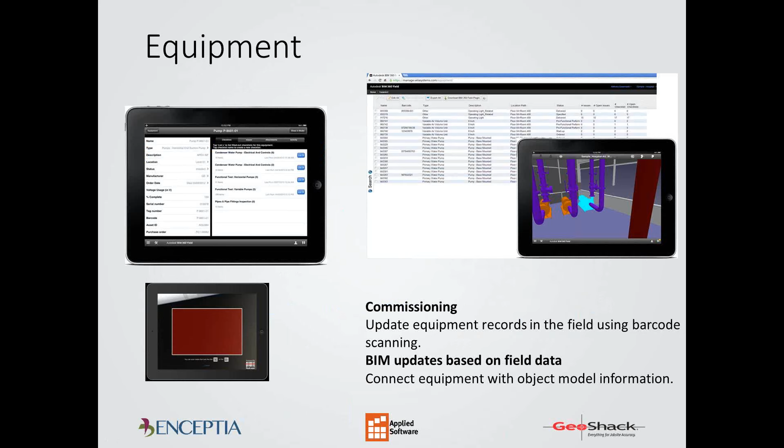Then reporting, typically done at the office. There are many predefined reports for you, and you can create additional ones. The reporting can even be set up to automatically send out a report at 4 o'clock Monday morning, so people receive a report on which issues are assigned to specific people or companies, which issues have been open the longest, and so on. Many different reports can be created with BIM 360 Field.

From there, I'll turn it back over to Lyle. Okay.

So now at the final stage, having brought the Revit model into the fabrication software, I've gone through the whole process and completed the job. I need to bring this back. This job requires a Revit deliverable. Instead of going back into Revit, at this time I don't have an exporting tool that sends directly back into Revit.

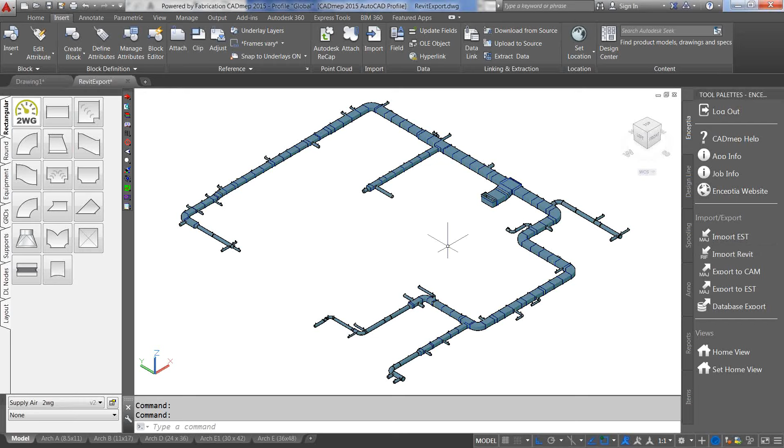But what I can do is export this out as an IFC file, and I can bring this in directly into the model, or send this out so they can bring that in. To take a look at that, I've already gone ahead and deleted out those items. If I link in the IFC file...

Here you'll see now that I've brought in my fabrication intent model through an IFC, and it gives me everything I've made changes to, added my hangers and so forth. So this gives me my Revit deliverable, allowing me to do everything in fabrication without having to redesign everything into Revit. That concludes this part of the demonstration. Jeffrey?

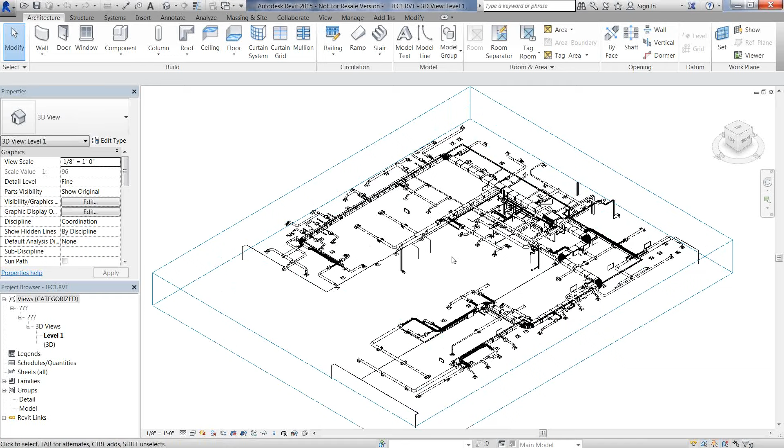Let me see here. All right, so let's just recap what we talked about. Again, that is a tremendous amount of information to absorb.

Before I go through this, I want to make sure everybody understands the intent here was not to get into the weeds in a lot of these areas. There are many important details that have to be addressed, but the goal of today's presentation was to show a complete workflow using Autodesk solutions, along with hardware from Topcon, Sokkia, and the DOT product.

The goal is to demonstrate how seamless this industry is becoming with respect to moving your digital information from design all the way through to handing over to the owner or customer.

There's a lot of opportunity to avoid rework, for collaboration, and for saving money in all kinds of ways—be it through simple productivity improvements, the business benefits of prefabrication, safety issues involved with prefab, reduced insurance rates, just a myriad of benefits that this workflow provides.

Many of you know these things, but for those of you not yet using all these technical tools, we'd challenge you to look at how you can bring some of them into your organization to further improve. So let's go through this one more time.

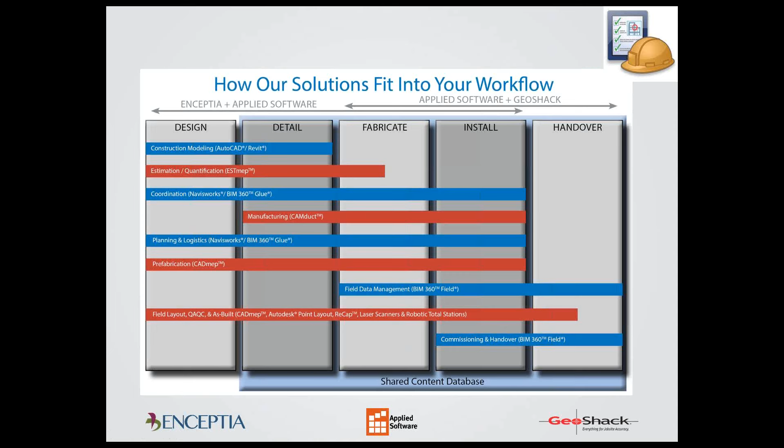I also saw some questions come in regarding the capabilities of Autodesk Point Layout, and Mark talked at length about the commissioning power of BIM 360 Field.